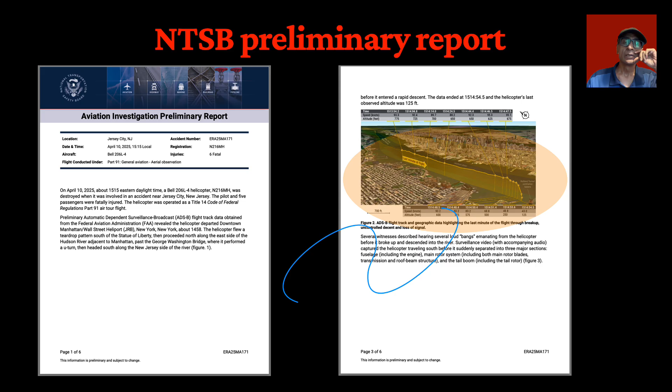And I think they've done quite a good job in really highlighting a lot of facts about the flight and the maneuvers, the last minute of flight, and so on. The only thing I just want to point out here is they use the actual clock time, Eastern Daylight Time, at the time of the accident. But I use a very different time reference here, and I don't use actual clock time. And of course, that different starting time reference hardly matters here.

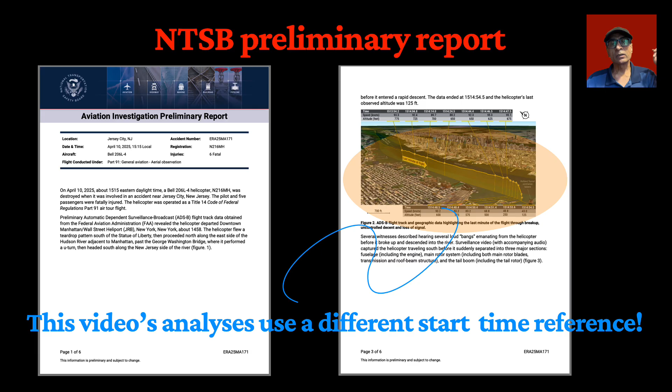Anyway, the big questions that I'm trying to address here are the why, the what, and the how. The whole work that I've done, I'm going to present here. So this video is really about trying to give some insight into the critical moments before the breakup. And by that insight, I mean something which a structural engineer would talk about with results from signal processing, image processing, and such things available.

And I've used only the publicly available video footage of the accident because there's no other official data from anyone. And I extracted everything from there, the image as well as the acoustic content, as I just mentioned. And my analyses are pretty standard. They don't use anything exotic. Very everyday kind of analysis that one would do in the world of signal processing and image processing.

I used something called scalograms, again a very standard approach to capturing, identifying, detecting phenomena which occur at very different time scales, like a very short duration event occurring on a long time scale. It's best captured through wavelet decomposition or a scalogram.

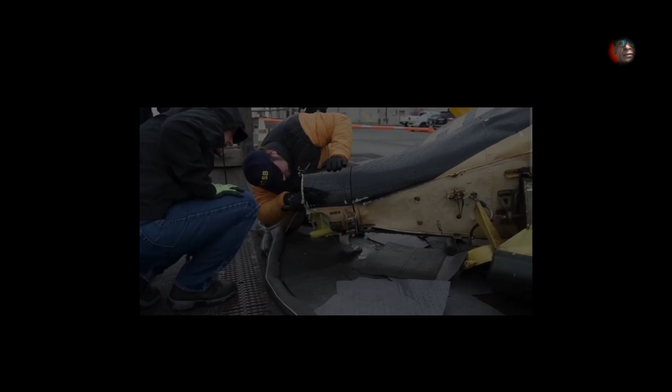Alright, so here's a second screenshot. This pale creamy region you see here is where the engine and main rotor are mounted. Again, to emphasize the tension face that I'm talking about, it's where this official's palm is being placed on the boom. His palm is on the surface that's in tension, or at least dominantly in tension.

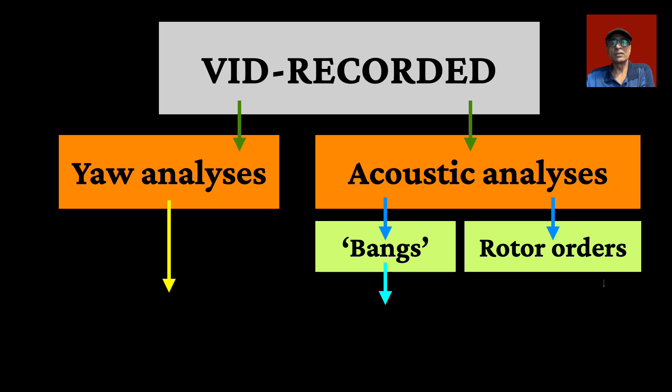And I was also surprised that I could capture the rotor orders, though the tower microphone and camera were probably nearly a kilometer away from the helicopter, and I think you could still hear a hum out there. Probably that was good enough to resolve the rotor orders too. But anyway, all these things lead me to conclude that a tail boom breakup happened from this rapid yaw. That's a very sharp, quick yaw. You'll see how quick it was in a while. Let's get to the yaw analysis.

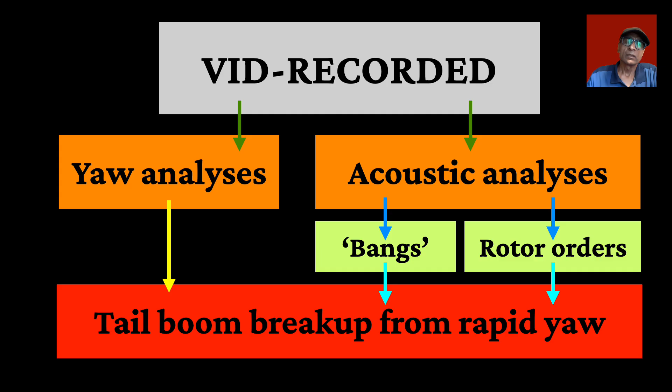So what I do is I take vid recorded, and I have done a bit of pre-processing here. I extract frames, the images at 0.1 second intervals. Then of course I had to enhance them, because vid recorded is pretty hazy, and I needed to bring them to sufficient clarity to confirm the direction of yaw and things of that kind. Once I enhance it, I get high contrast grayscale frames, and then I crop them to a small bounding box that contains the helicopter.

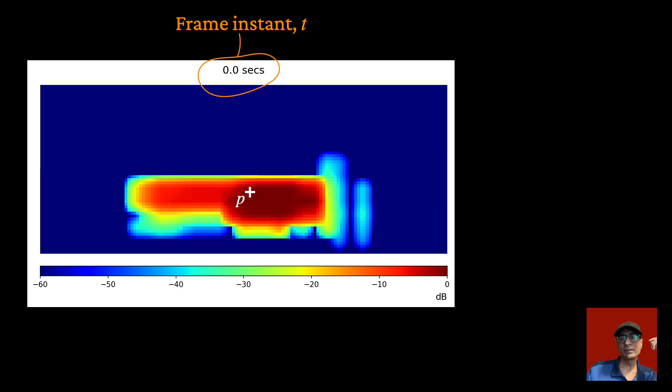Well, I'm going to come to what they are, and I guess you might already guess the deep red is fuselage, of course, and light red is the tail boom. Now what I do is, for any pixel like this sitting in the deep red region, I define I jet as the intensity at that pixel on this scale, the decibel scale, the dB scale.

Now, in order to isolate this fuselage and tail boom combination, the group, and why I want to do that is because obviously, if you want to recognize yaw in this helicopter, you do so by looking at the extent of tail boom that you see from where you're looking at it. So relative to this particular frame, if there was a frame where you hardly saw anything of the tail boom, you're almost looking along the tail boom, and yaw is almost 90 degrees from this position. So that's what I'm trying to do here as well.

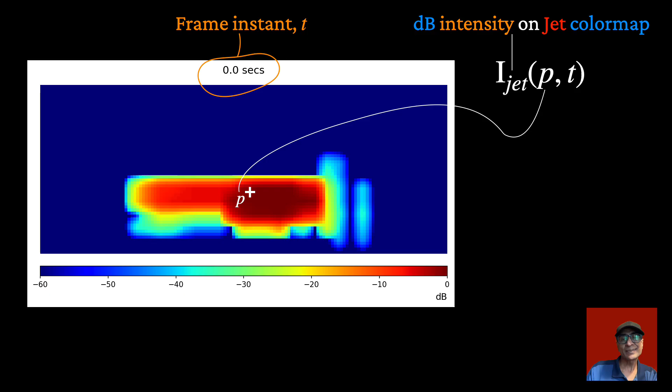So I define a set called P10. P10 is the set of all pixels that fall in this minus 10 to 0 decibel range. That's the most intense reddish zone of it. As you can see from this color map, you would agree with me more or less that it reliably represents the fuselage and tail boom group there with high signal to noise ratio.

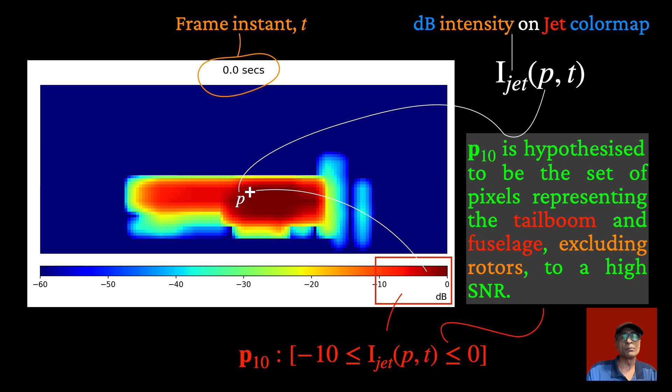All right, so now let's look at a GIF of this helicopter flight here. That GIF is going to play now, and just before I start, look at the little red rectangle box on the top. The helicopter is in that box. It's always good to remain in that box throughout playing the GIF. And also look at the time on the top, the 0.00 seconds that you see here, the time T.

Okay, now let me play this, and you can compare the time and the corresponding helicopter's position. By the way, this GIF has come from the enhancement of frames, so it's much sharper than the recording that you saw a while ago. Okay, here it goes. So if you look at this, at the start there is hardly any yaw, but somewhere around 1 second, I think you see a nearly complete yaw. The helicopter is completely yawing to the right by 1 second.

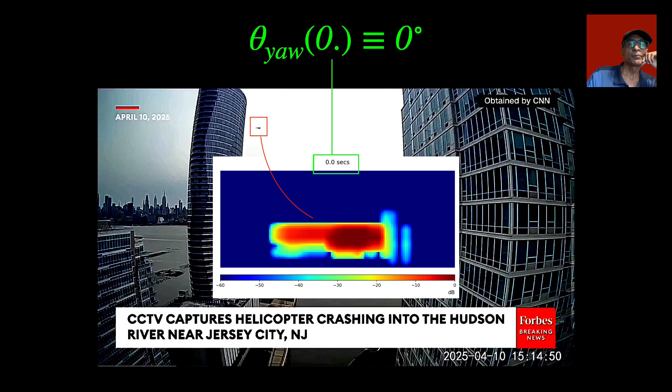So I used that fact to determine the limits of the 0 degree yaw and the 90 degree yaw on the time scale. Now what exactly I've done is something like this. At 0 seconds of that GIF, or the recording I have used, the helicopter looks like this. You hardly see any yaw in it. You could zoom it if you want to, but I think it's quite obvious from this jet map as well as from the enhanced frame that you don't see any yaw there. So I define theta as 0 degrees at 0 seconds.

Now the other extreme, when you come to the 1 second stage, you see the yaw is almost complete. You're looking almost along the tail boom, so you hardly see it in either the jet map or the frame there. So this is 90 degrees at 1 second.

All right, so now what I have to do is get a relation between these two. I map the 1 second time to 90 degrees and the 0 second time to 0 degrees, so I just do a linear mapping of time to angle. And here's how I do it.

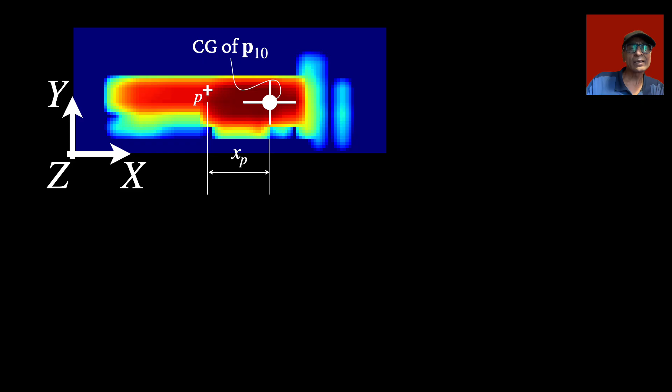I first determine the CG of the P10 region, which is like finding the centroid of an area of varying density. Then, using this XYZ coordinate system, I call xp the distance of any pixel p from that centroid.

Then I compute a simple metric, something like a moment of inertia about the y-axis lying at the CG. That comes from a summation over all pixels that lie in P10, not indexed 1 to P10, but implying it's for all pixels in P10.

And then, this is always going to be positive. The xp squared makes it positive, and intensity is always there.

Now what I do with this is, if you look at this particular frame, it looks like a 0 degree frame, and in fact it is. So you'd expect the IYY to be quite large for this frame. Correspondingly, when it comes to the 90 degree position, as in those two frames I showed earlier, you would not expect much IYY—it would be quite small, much smaller than this.

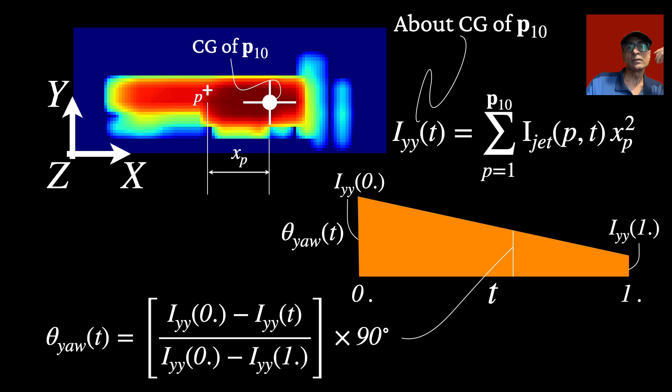So that obviously sets a relation between I and theta. I use the fraction of the full I range to get the mapping from 0 to 90. It's as simple as that—it's just a linear relation between I at t 0 and I at t 1.

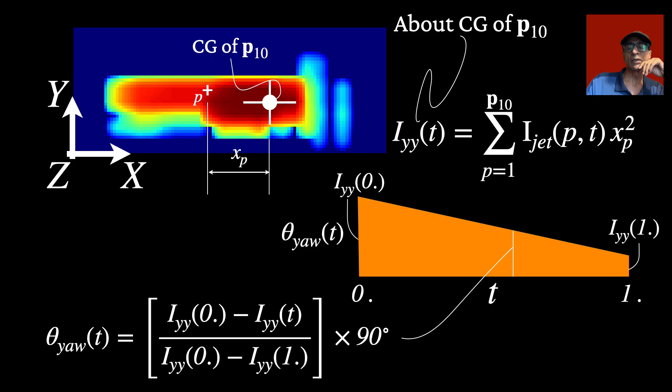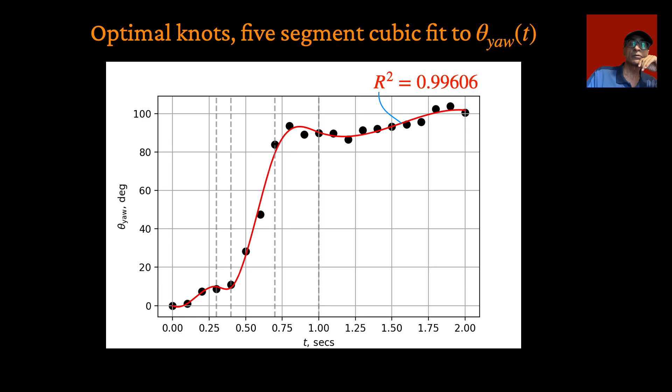I had to go for a 5-segment, optimally placed knots cubic fit, so the optimal knots are shown as dashed line segment boundaries, and this has a very good correlation—you can see it's 99.6%. But the point to notice isn't how pretty the fit looks, but rather this.

The yaw angle theta is really jumping almost 90 degrees—83.6 degrees—in just 0.4 seconds. That's much less time than it takes to blink an eye. Imagine a helicopter doing nearly 90 degrees in that time.

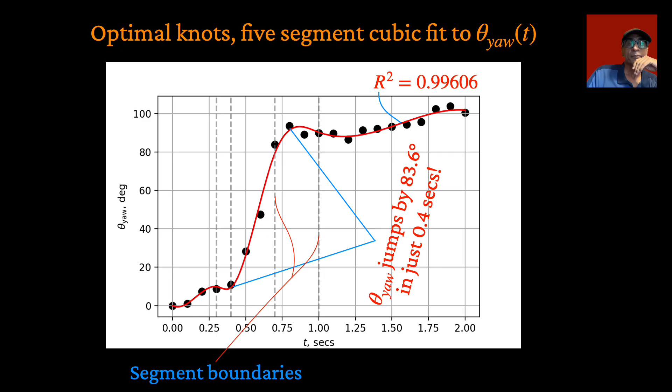I'm sure that itself might have done a hell of a lot of damage to everyone on board, if not the structure. But what we know from the analysis isn't what happened inside—at least the structure is what took the blow, and why and how it took that blow we'll see in a while. I didn't go beyond 2 seconds because the helicopter's breakup itself happened at 2.2 seconds, so whatever I wanted to capture happened in this 0.4 to 0.8 second window.

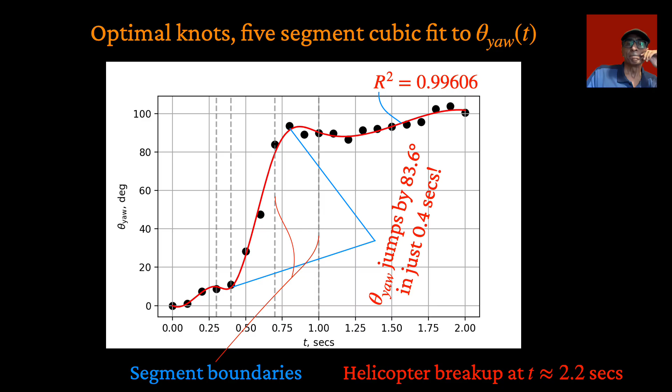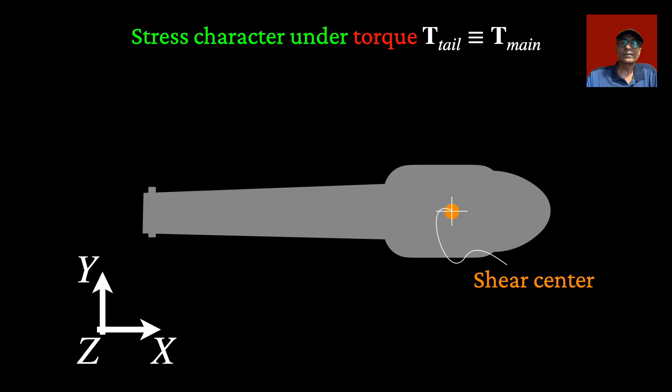In that situation, you'd find that the main rotor's torque, which I call T main, is exactly balanced by the torque coming from the tail rotor in order to keep it from yawing. And the tail rotor's torque is F tail times d sc, the distance to the shear center.

The shear center, by the way, is an imaginary location in this case of the shear flow that's happening in the fuselage due to this torque. Any book on aircraft structures would tell you more about the shear center, how to compute it for various cross sections and so on, but I'm not going to spend my time on that here.

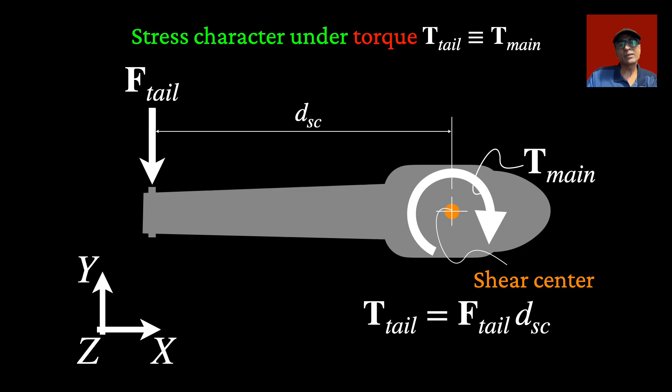Anyway, the corresponding stresses developed in the tail boom, if you look at it from the top, it's more like a beam, really like a cantilever beam. For example, it's anchored here and you have a load at the tip. That will cause tension on the upper side here, so you see that tensile stress there. That's a skin tensile stress.

The bars here represent the magnitudes, and I've made the bars go up from a small level near the fuselage to a high level near the tail. It's just a reasonable picture that I'd expect, because I can't simulate or numerically model anything yet since I don't have the data. But you can see that the tail boom is tapering, so as it tapers, you get a drop in the moment of inertia associated with bending. Concomitant with that drop, the sigma has to go up to make up for the lack of moment of inertia. So I've roughly shown this variation from the fuselage to the tail boom.

And again, on the counterpart on this side, the compressive stress would look like this correspondingly. Alright, so I call this sigma xx normal—normal meaning a peaceful flight without any yaw.

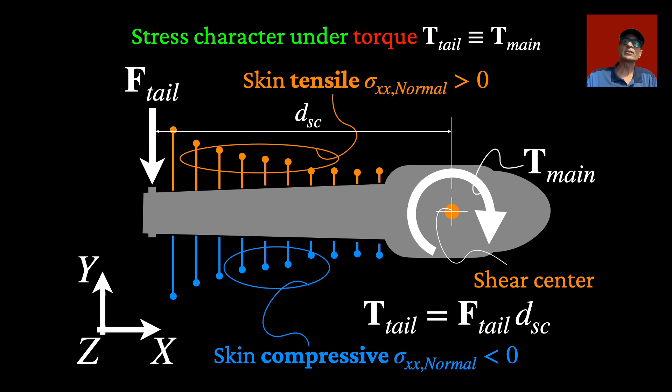Now let's look at the situation when a jam has happened in the tail rotor. That means the tail rotor is not really able to deliver torque—it's just seized momentarily from rotating. If that happens, T main is still active, but there's no T tail, because F tail has just momentarily stopped. So what does that mean?

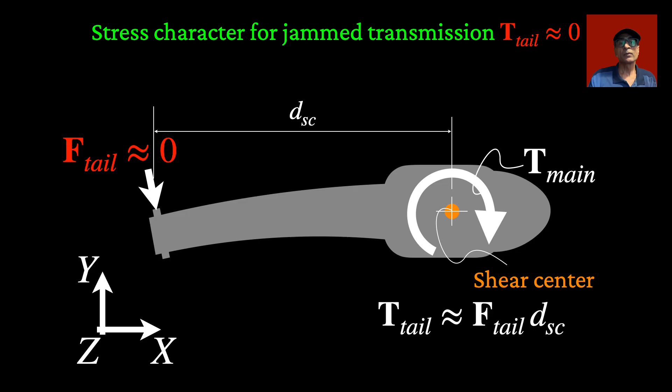The helicopter is now going to yaw, but yaw here is not a static situation but a dynamic one. So what's really taking place is a flexible body undergoing also a rigid body rotation, which is yaw. And it's flexible obviously because the tail boom is not a rigid body anyway—so you see it deformed like this.

Indeed, the deformation is much like a cantilever deforming under a tip load. But where is the tip load here? Well, it's a good question to ask. There's no tip load because F tail is zero. But in this case, it is not the tip load, but rather the inertial load sitting on the tail boom, coming from the tail boom itself—that inertial load comes from all the mass of the tail boom, with of course the mass of the tail rotor, which is very much still there.

Mass cannot be destroyed, it's still very much there even if it's not doing anything. And that, associated with the angular acceleration, causes this kind of transverse load to act on the tail boom, which in turn causes this deformation.

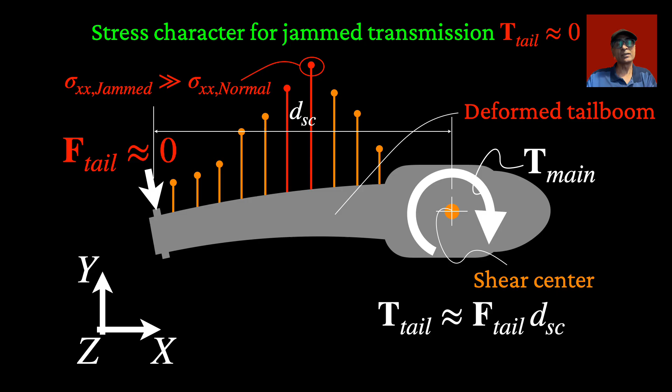Alright, so now look at the stresses in this situation—you'd see it's quite different from the normal case. There's a peak somewhere between the fuselage and the tip of the tail boom. At that place, sigma xx, the stress component normal to the xx face, is going to be very high, much higher than what you see in the normal situation. And the counterpart on the compressive side will also be like this—you'd see again a very large sigma xx on the compressive side too.

So obviously, what does it mean? Things are well outside their safe levels. Once past the safe levels, you'd expect things to start failing. It's not necessary that both failures, tensile and compressive, happen at the same time—they don't have to, and I can't even say which one happened first, because that depends on a lot of things, the margins related to their respective failure modes. Anyway, the point is not to sit and wonder deeper into it, but at least try to qualitatively look at it, like what I'm doing now.

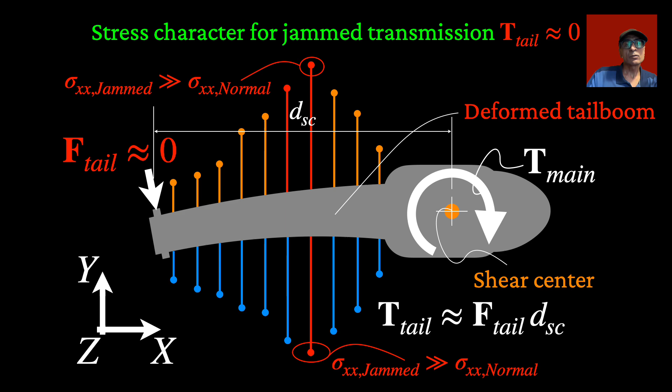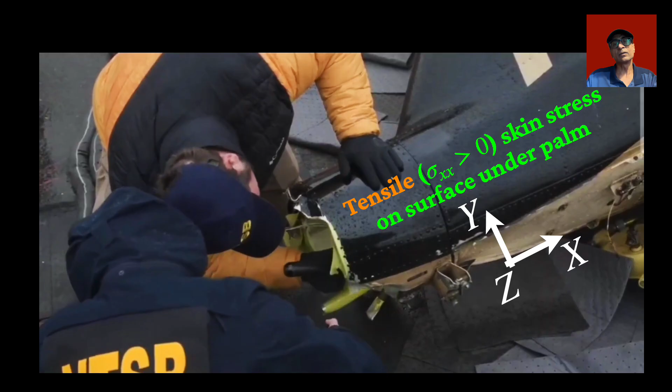Once this happens, you would expect something to fail here, and look at how it failed. What does this tell you? If you look at the person's hand palm here, his palm is on the tensile side actually, and you see a kind of neat tear here that's across a group of rivets there.

That's something like tearing off your check leaf from a checkbook. You have perforations there which are precisely meant for this purpose, meant to tear exactly along the line of perforation, very neatly. And that's exactly what seems to have happened here. So this tensile failure here, you do see it happen.

By the way, if my memory is right, I must acknowledge at this point a few of the other experts on YouTube who did talk about this long back. I think probably Captain Steve. I'm very sorry if I haven't acknowledged anybody else. It's not intentional because I'm not able to go through every one of the videos that have come on this to pick up every point, but I'm sure this is not the first time that has been said. Some people have rightly already observed that there was tension here on this side, and of course I concur with them.

Yeah, that's a tear failure I was just talking about. And it's not necessary for the tear failure to happen all over the zone in tension. It's good enough if it happens over part of it, because there's a circumferential distribution of this tensile stress. So if the failure margin is such that it's crossed a certain part of it, only a part of it, that part would fail. But once that fails, everything gets into a nonlinear kind of evolution of failures.

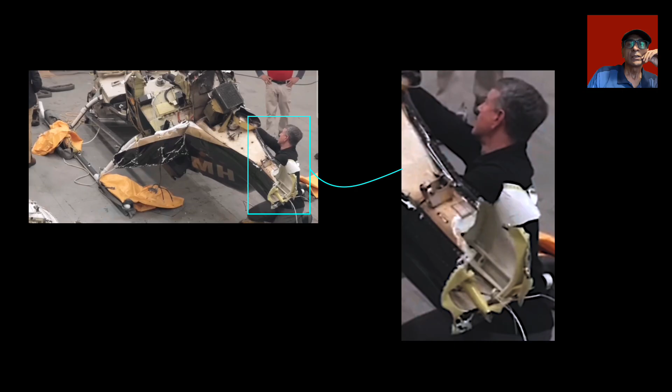Let's look at the compression side. This is another view, another screenshot, and I want to zoom in and highlight this part here. What you see here is kind of on the other side of it, not exactly precisely on the other side, but somewhat the other side to the tensile one. You do see failure of a very different kind.

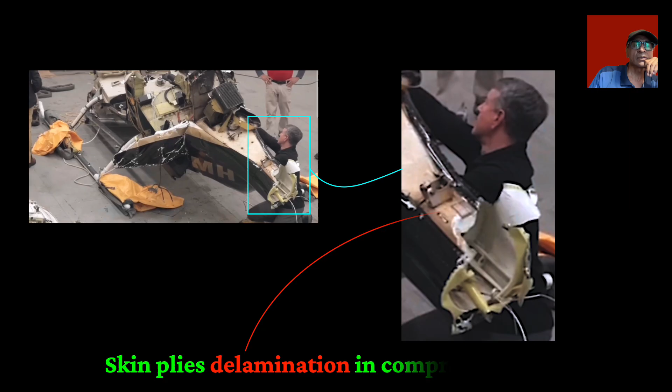You don't see the kind of tear there, but it kind of looks more like a delamination in that zone. It's a bit hard to say exactly how much it's exactly opposite to the tensile side, but it roughly agrees with what you would expect from a dual tension-compression kind of character in the stress distribution.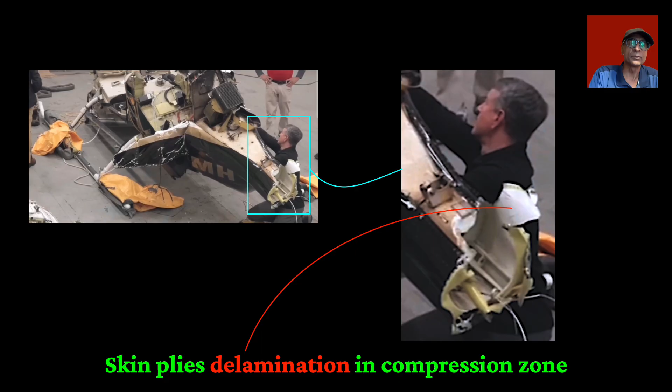Alright, but I also feel when I look at that tear, and this kind of transmission shaft that's sitting there, to me it looks like there was a shear stress failure on this. If I look very closely, that kind of failed surface of that.

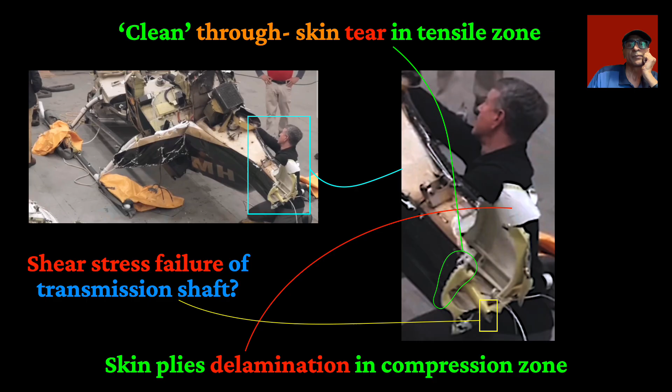Now that's a serious thing, because if the transmission shaft was the first to fail due to this jamming, I would expect that was the first failure to occur in the entire system, well before the structural failures too. So if that had happened because of the jamming, yes, that would have meant obviously no tail rotor torque, and of course the rest of the story, just what I mentioned a while ago.

All right, now let's try to complement this with the acoustic analysis. Again, as I said, I'm fortunate to have run into that video footage too, because it's not bad — I could still do a lot with that footage, from a public domain footage out there.

So this is the acoustic amplitude that you hear from the microphone as a function of time. The splash occurs somewhere around a little past 9 seconds, if you can correlate it with the time in the black box recording. But what one should really notice is this little burst that happened somewhere around early enough, I guess 0.4 to 0.6 seconds, somewhere out there.

So what I did was take the first 4 seconds of this, and decided to take a very close look at that 4 second window. I see this first — this is the 4 second window I'm talking about. Again, I do see that burst out there, and I thought that's really where all the answers to most of the questions are, so I put that part of the data through a scalogram analysis, a wavelet decomposition.

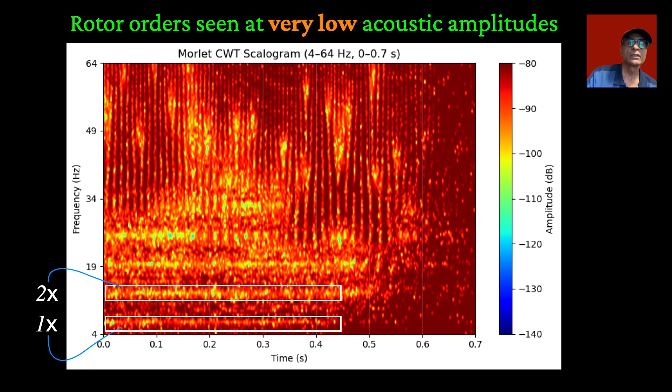Anyway, so what we see here is the things are ending around 0.45 seconds, which is kind of agreeing well with that sharp yaw that we saw between 0.4 seconds and 0.8 seconds. So it looks like with the rotors, really, something happened there. So we don't know what exactly happened, or how exactly it happened. But anyway, they seem to agree: the stoppage of the rotors and the commencement of the sharp yaw.

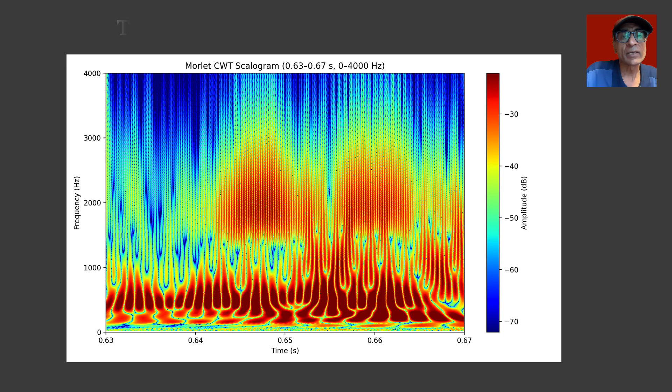So if you go to the other extreme, the high frequency regime and also the high amplitude, this is what I see. So you see two bangs out here, two sharp bursts. They are somewhere in the 1500 to 3000 hertz range. This is pretty likely to have been a structural breakup kind of bang, because there's nothing in the helicopter that's going to be of these frequencies. No matter whichever order you look at, it's not going to be anywhere in this neighborhood of 1500 to 3000 hertz. They're all in a few hundreds of hertz at the most.

So these are certainly structural failures that have caused these bangs, and I guess these are the ones that people heard around them. And I've just said that this is the tensile zone, that's the compression zone. I might be wrong here because I don't know which happened first, but I just looked at the sharpness or the intensity. The tensile zone looks to me a bit sharper than the compressive zone, so I'm just guessing.

But it doesn't matter here, because I think it's good enough if we could get this far from a publicly available video footage, and at least zero in on the moment that the structural failures really happen. So it's not that terribly important to know which happened first, the tensile one or the compressive one. Who cares anyway? It's the whole thing. What we obviously need to look at is how to stop such things from happening again.

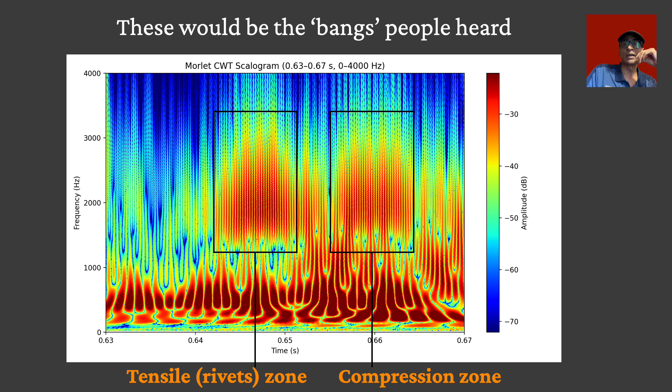All right, so I could summarize it, and the first point is, of course, just reiterating it again, the high rate of yaw, 83.6 degrees in just 0.4 seconds. I think this itself would have been damaging to people inside, would have injured most people, probably even the pilot too, I don't know. And of course, in the spectrograms, we could see the rotor orders out there and the precise moments of the structural failures, the bangs before the breakup.

Now, this very rapid rate of yaw, in structural mechanics language, is a high flexural load on the tail boom, and that's been induced by inertia, as I mentioned a while ago. That severe load would have been so severe as to cross all the margins or safe levels of the stresses there, and of course the breakup. This is the explanation I have for the failure, the initiation of all the failures there. All right, I think so.

It's the main rotor transmission that certainly got jammed, not the tail rotor. And why? Because there has been a very similar event in 1997 in Canada, where in this Canadian accident the main rotor transmission was the one to have jammed. But fortunately, in this case, the pilot survived with his passengers.